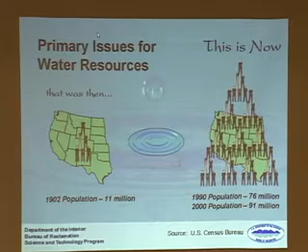Population - what are the drivers behind desal? Growth of population. We're a Western resources agency, and this concerns us tremendously. Why people want to live where it's dry, I have no idea. But then again, I don't live in South Chicago or some dreary place like that - I live in Golden, Colorado, which is a beautiful place. With all those people, we have tremendous water needs.

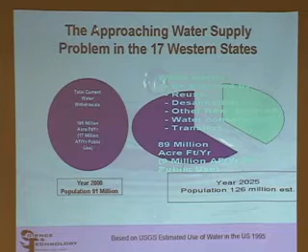This is a really rough calculation - I'm sure there are much better ways of doing it - but basically you take a look at the projected increase in population and how much water they're going to need. The reality is that we're not going to meet this through desalination alone. We're going to meet it through things such as reuse - that's another technology way of doing it. We'll meet it through conservation, through water transfers - there's a whole slew of things out there that are going to have to be done together.

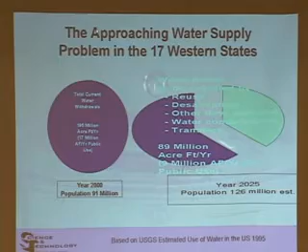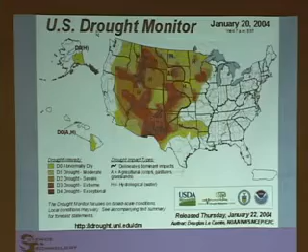Of course, another driver out there is drought. Historically, there was an additional driver, which was international boundary issues, specifically with Mexico. That doesn't seem to be quite as big at this point with our drought, but it's looming out there. It may happen yet. So here's some of the drivers behind why we have problems with water resources.

The growth of the population, need more water. We have drought. We have these what appear to be some sort of a climate pattern that includes drought. We've been in kind of a dry series of years lately. We have a much more complex demand. It's not just for agriculture anymore. We've got a lot of other people wanting it. In fact, some that weren't even at the table originally, such as endangered species and Native Americans.

We have environmental impacts, and then of course, it's still not totally known what global climate change will do, but I'll tell you, there isn't a lot of snow in the Colorado mountains right now. It's melting really fast.

The real big issue when you sit down and talk about desalination is everybody wants to talk about all the different water, all the ways of coming up with additional supplies of water. And when we wrote the roadmap, it was really hard to focus. So we finally came up with this chart and said, here are some of the different ways to deal with water and water supply. And we're only going to focus on the little area on the right-hand side in technology.

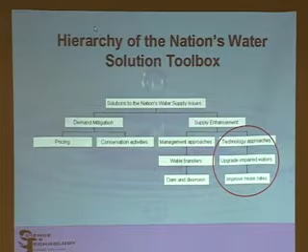Now it ends up that my agency is famous for that other area there, dams and diversions. We don't see a lot of that going on right now. But it's interesting, it's been interesting to us to see what can we do with technology, and specifically desalination and reuse. I'm not going to say too much about reuse, but we have a pretty large program in that.

The Research Council, when they did their report on envisioning the agenda for water resources research in the 21st century, suggested that new supplies could be enhanced by development of new supply-enhancing technologies or reducing the cost of existing technologies. That's really where we headed with our roadmap, was how do we have a chance to reduce the cost of these technologies? These technologies realistically are still too expensive in the majority of cases. If you're sitting in Riyadh, Saudi Arabia, and you have no water sources, it may not be so ridiculously expensive, but where there are other sources, it's a problem.

So the benefits of desalination: basically looking at existing water supplies that aren't currently being used, whether it's brackish or ocean. Drought-proofing — if you're pulling from the ocean, at least depending on how you look at it, it's a limitless supply. That's not exactly that simple. It provides local control. If you're sitting at the end of a great big long pipeline or canal or transbasin diversion, local control starts to mean a lot more to you, especially if you're at the end of the pipeline and you don't have a choice as to what happens to your water, or you have minimal choice.

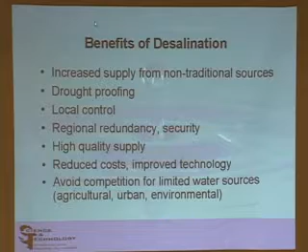This is something our research director came up with. I guess it justifies my existence as a researcher, but it is true. It's very hard to forecast because many times people underestimate what technology will do, both positive and negative. It's been really fun to watch these tremendous dislocations.

In essence, people don't have to string lots and lots of wire for telecommunications anymore. They can do cell phones. Just a lot of neat things. And a few of us actually believe there's still a lot to be learned in desalination, and that's why we've done the roadmap.

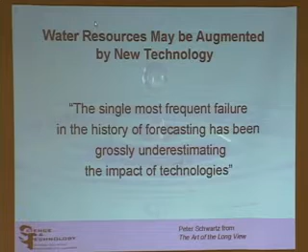And of course, what could the water be used for? Cities, industries, rural Native American issues. We have a real big issue in the Intermountain West with all this water that comes up from when you produce gas and oil. We get a lot more water, actually generally contaminated water, than we do gas and oil. It's a real problem environmentally.

I've always, usually I leave off agriculture because it seems so ridiculous. And I have a slide here which will show that actually some people are doing this, and they're doing it economically.

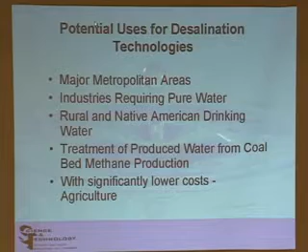Costs of desalination are very variable. They're also not apples to apples. If you're trying to look at one plant, say in Tampa Bay, and they report $2.07 a thousand gallons, and you're looking at a plant in Israel reporting in cubic meters, you've got the problem of translation between the units. But then you also find that people neglect to include their land costs, or they neglect to include subsidies, whether it's for land, electricity, or water costs. So it's really hard to know.

But seawater desal right now is being reported around $650 to $1,000 an acre foot. It can even go higher in very specialized cases. Brackish desalination should be less because there's less salt to take out, but there are a lot of issues surrounding brackish desal, and it's very dependent upon the ions that are in the water.

Just in comparison, some of the water that the Bureau of Reclamation had to rent for the Rio Grande this last summer was running at about $350 an acre foot. Metropolitan, if you're buying new water from them, is running, our understanding is, about $500 an acre foot. Conservation is $350 to $500. Water recycling is $400 to $800.

These are life cycle costs, not just - at least that's my understanding. And of course, bottled water is the fun one, because why anyone would pay $1 per liter for bottled water is still hard to understand. And of course, I have my water with me. So there's a whole psychology to this. There's a whole non-engineering side to water and reuse that we're just starting to investigate right now.

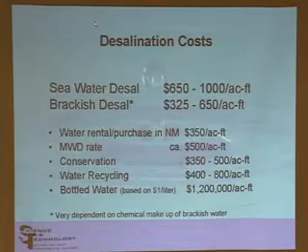So I'm going to talk a little bit about what's going on in the world. There's two competing technologies. One is pretty mature - that's multi-stage flash, MSF. It's a thermal technology. You boil the water, you condense the vapor. It creates very pure water. You see it all over the Middle East.

It ends up that, just as an aside, most of the infrastructure in the Middle East was put there, or at least was assisted by the United States. So if it's a bad idea for them to be doing it, it's probably our fault.

The red line is the membrane processes, or reverse osmosis. You can see that over the years the membrane processes have been overtaking the thermal processes. In Europe and the United States, it's much more economic to pursue the membrane processes than thermal. Generally in the Middle East, they are dual-purpose plants - they produce both power and water, and you can optimize for power and water. In the United States, we don't have that integration of power and water.

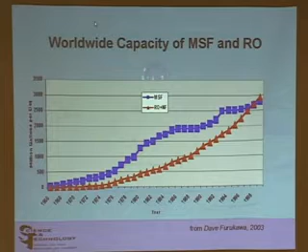To give you some idea of the magnitude, this is Al Jubail in Saudi Arabia. This plant's about 2 kilometers long. Over on this side are the stacks where they generate the electricity. These are what are desalting the seawater, and this thing just goes forever. It's huge. It's mind-boggling. It's the world's largest plant.

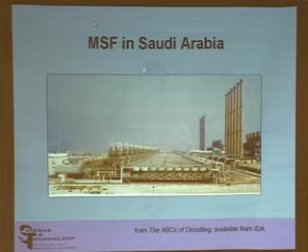And that's been pumping out water now for probably 20 years. It ships a little over 100 miles into Riyadh and provides probably 70 to 80% of the city's water. This was one of the reasons why everybody's worried about the desalting plants during the Gulf War.

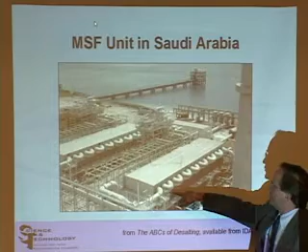Just to show you a closer close-up of one of the multi-stage flash units. These are all the different stages. This is one unit. It's nice because it's modular, so literally you can blow one of these things up and keep the plant running. It's an interesting consideration because it does happen—people don't operate them well sometimes.

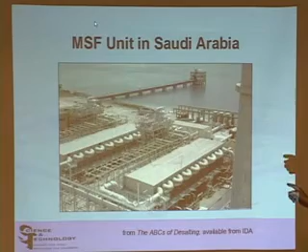And I mentioned agriculture. It ends up that Spain, who you'd never think of doing desalting, has just put in a tremendous amount of desalting capacity. It also ends up that a portion of this is going to high-value crops that are being sold back into Europe—a very, very unusual situation.

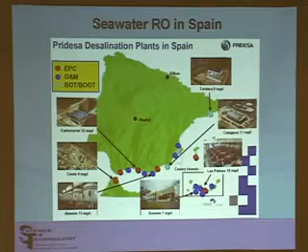And of course, here in the United States, we have Tampa Bay. If anybody has questions about Tampa Bay when I'm done talking, I probably have some information on that one too. This is what got everybody so excited and created desalination fever, to the point where everyone is a desalting expert. And there are real limitations to this technology that are forgotten.

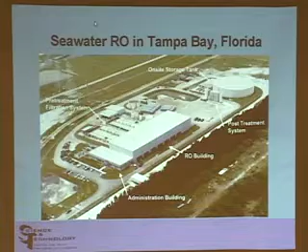Although there is a slight problem: if the water going into these things has particles in it, those particles tend to sit on the membrane and screw up your process. So you've got to have good pre-treatment, and that's one of the issues that's holding up the startup of the Tampa Bay plant right now. This is the first large seawater plant in the United States.

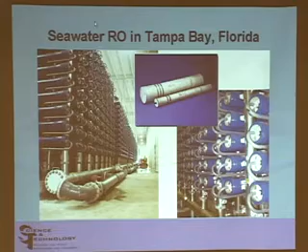Generally we started with some pretty small plants that were quite expensive, and we've seen the costs come down. Tampa was phenomenally low, everybody thought. And then came Ashkelon 1 and Ashkelon 2—these still seem incredibly low. And now we've got Singapore, which seems incredibly low.

I'll mention at the very end, we do have a workshop that we're setting up right now in the first week of December in Cyprus to bring all the world's experts together and start developing techniques to normalize these costs, to do apples-to-apples comparisons. Every one of these plants is costed in a different way, so it looks really great, but you've got to dig into how they came up with this stuff.

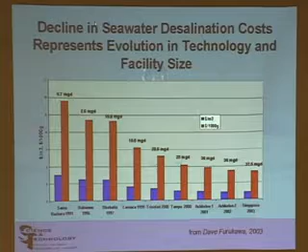This is a very complicated slide, and I apologize, but I wanted to show you that the costs of desalting have come down for many reasons. It's through engineering improvements—incremental improvements. It's not revolutionary stuff. This is the engineers and the vendors doing their job and the marketplace doing its job.

One of the things not to forget is energy. Energy has been the major issue around the use of desalination and continues to be the issue. But we've got some pretty cool energy recovery technology that's just starting to get up to larger plant scale size, and as you can see, the energy recovery has come down tremendously. We're able to reuse about 95% of the energy that goes into these desal systems through energy recovery.

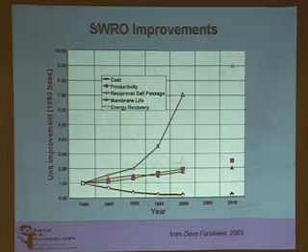I wanted to show you the radical difference that's occurred over just the last 20, 24 years. We've really seen an efficiency in the use of energy. We're about 95% efficient. The real question is, can we get even more efficient? There are beliefs within the research community that we can reduce the current

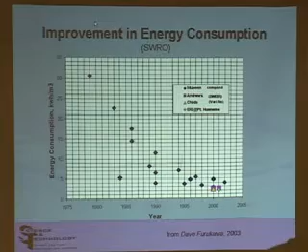use of energy. This is the energy needed, as I understand it, to do the reverse osmosis process. That doesn't mean the pretreatment, doesn't mean pumping up the hills, doesn't mean all the ancillary stuff. This just means around that membrane, taking the pressure up, getting the salt pushed off, and getting the water through the membrane.

This is something we're seeing more and more of, going in to replace MSF. If you look at reverse osmosis with the older energy recovery, it's a pretty good change in efficiency. Our contractor VARI-RO is showing how much greater they are than this. But the point is we actually have about three technologies: VARI-RO, the DWEER, which is going into some commercial plants right now, and ERI, which is also going into commercial plants. VARI-RO is yet to go into a commercial plant.

But you can see we're continuing to squeeze out the last bits of energy.

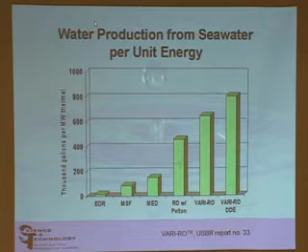The cool thing is this one right here. We were looking at a Brayton cycle engine. What would happen if we converted the energy source directly into mechanical energy? Not go to electricity and then to mechanical energy, but go directly to pressure. That's what this one is all about, and we can actually create some pretty good efficiency. So there are ways of squeezing the energy and recycling and reusing it better than we do.

And it's not because of the technology, it's because it costs so much. The government doesn't want to spend $30 to $40 million a year to run the plant when there are other ways to get that water to meet the treaty with Mexico, or at least to meet the water quality obligations that we have with Mexico.

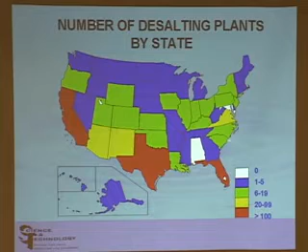This is for the policy types, the stuff that's being presented to the policy types. So I would say take it with a grain of salt. There's somewhat of a desalination fever here. Some of this stuff is for real, but I would say the majority is just being talked about.

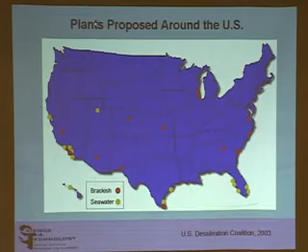So in terms of reducing costs, where are we today? Well, Tampa Bay taught us some interesting lessons. Creative financing goes a long way. There are ways of reducing bond costs through public-private partnerships, things like that. Also, we learned that co-location with existing power plants works out really well to bring down desal costs, because we don't have the infrastructure for the intake and outlet that we normally would have. We can piggyback off the power plant, and we can also take a bit of the heated cooling water, which improves our desalting process.

There is some opportunity for maybe doing regionalization, building bigger plants to bring down costs more, that type of thing. But really, from my perspective, the highest potential to reduce costs is to find better ways of doing desalting through research. And that's what the roadmap was about.

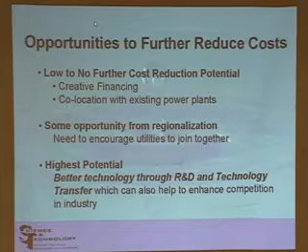Now, the roadmap is not a report of the Bureau of Reclamation. This is a sleight of hand. The Bureau of Reclamation is afraid that we might make policy by saying that we support desal. But it is a report of the Executive Committee.

The Executive Committee is pretty cool because we had an economist work with us engineers. We even had a public health expert. We had a real utility person, political scientists, university professors, and some consultants. They always help us, but we went outside of where we normally would go to get their input on what they see as essential to make desal work, and what research areas we need to be in.

My management, or the Assistant Secretary's office at the Department of Interior, wanted to better understand the value of this roadmap. So we ended up taking this to the National Research Council, and in the last month or so they published a report on this. You can get the report off their website, and you can get the roadmap off ours. I'll talk a little bit about the roadmap.

I'll try to summarize this in a simple way, and if you've got questions, I'll be happy to answer them. I don't think I can do justice to the roadmap. We struggled for at least our first 3 or 4 meetings to figure out what a roadmap was. What we did is we created a vision statement, and that helped bring us together a bit.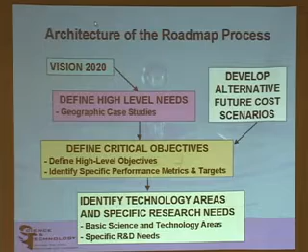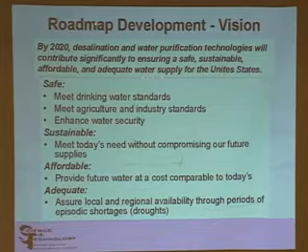The vision we came up with - the National Academy's review had some issues with a couple of our words here - but it comes down to: by 2020, whatever research we do, we would like to have made our drinking water supply more safe, in a sustainable way, in an affordable way, and make sure we have adequate supplies of water. Now, all these things are really hard to define, especially when you have an economist, a political scientist, and a chemical engineer - their definitions of these things really vary. So it was a great discussion.

So as I said, we broke the needs into different geographical areas, and one of them was coastal urban communities. About 54% of the US population lives along the coast or close enough that a seawater desal plant might have an impact, depending on how high up you have to pump the water once you desalt it.

Various parts of the country have different issues. Tampa Bay is interesting because basically they have a great big sponge here, and they're pumping it dry, which is hurting the environment. Southern California has these major transbasin diversions of water feeding population. Coastal Texas has subsidence and other issues - in fact, they import a lot of water from inland too.

So what were the needs? We want to reduce the cost. This biologic stability is a pretty specialized thing, but we want to reduce the reliance on surface water that is needed for estuaries in the coastal regions. We also want to decrease the reliance on remote sources of water.

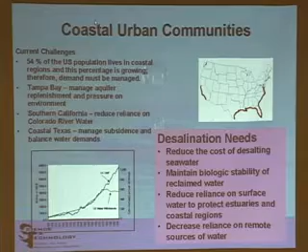Inland urban areas—these are the Las Vegases, Phoenixes, El Pasos, those types of cities. Anyone that's looked at desalination knows that the number one problem in desalination, and it shows up with these cities, is...

The real issue here is disposal of the concentrate. You don't destroy salt, so where does it go? Big, big problem. If you take a look at inland desalting, the real cost is not the desalting process, it's the concentrate disposal process, and it can easily double the cost of a desalting plant.

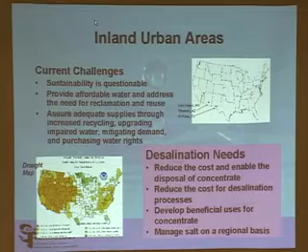So that's where we're investing quite a bit of research dollars right now. I'm just going to continue on through this and talk about some of the different issues here.

Rural inland communities—the Bureau of Reclamation is in a strange situation. We're being directed by Congress to build huge centralized treatment plants on the Missouri River, for instance, and these things have huge distribution systems that go out 1,000 miles. It's hard to keep a chlorine residual, that whole bit. So we're looking at point of use treatment, and desalination is a great way to do that. But we're limited by law that we can't pay the operation and maintenance of these things. When you get to point of use, it's all about operation and maintenance, not about paying for the infrastructure.

I mentioned earlier coal bed methane and the pumping or producing of oil and gas. We produce a lot of water in the inland states. This is becoming a real environmental disaster. In some cases, they actually pay $10 per barrel of water, which is a lot less than 1,000 gallons, to remove the water, to pump it back down into the ground. So desalination all of a sudden starts to look economic in some of these cases. It ends up that Department of Energy, Sandia, our partners on the roadmap, are pursuing this area. I think that's a great place for DOE to be spending some research dollars.

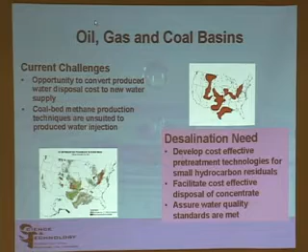Mid-Atlantic—nobody thinks of the Mid-Atlantic having water problems, but obviously they're overpumping their aquifers. They have tremendous issues about protecting their water supplies, whether it's New York City and all the communities that live up in their watershed area. I even heard recently New York City was looking at desalination of some of the bay. I think it was just a study, but...

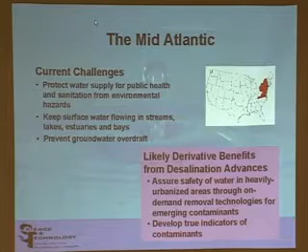Now I talked about critical objectives. What we did here is we said, okay, we want to do something in the next 5 to 8 years. We also want to do something over the next 15 to 20 years, and so we have what we call a stretch goal. The short-term goal, for instance, on keeping water affordable is to be able to reduce the capital cost of a desalting plant by 20%. In the long term, and who knows how we'll ever get there, but it means we've got to develop some new technologies, new methods of doing things. We would like to see, as a stretch goal, the capital cost of these plants reduced by 80%. Might mean we have to get rid of the pretreatment.

In other words, our membranes do everything—could be other ways. We want to increase the energy efficiency from where we are today by 20%, and ultimately from where we are today by 80%. People are saying this is impossible. It ends up that it might very well be impossible, and so the next part of our roadmap is to go back. The National Academies have a proposal in with us and EPA and a bunch of the nonprofit research foundations where they would put together a panel of expert scientists that would go back and review the different technologies and see where is the theoretical limit, how far can we push these things, and get this onto paper. The last time something like this was done was in about 1962, and it's a great way to try to set goals for researchers to accomplish. Also, it helps people like me justify the requests for the budgets that we ask from Congress.

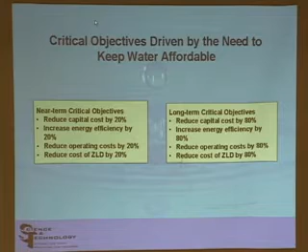We send salt into Phoenix. We have mounds and mounds of salt in that water, and it's not being disposed of—it's going into the groundwater. The same is going to be true of desalting. Where is that salt going to go? You can't just send it to the next city down the river. What we really need to do is figure out an effective way of treating our concentrate, taking it down to salt, and ultimately the dream—which is really, really difficult to accomplish—is are there commercial values to these salts? Are there ways we can get a product or a value, somebody to pay for them?

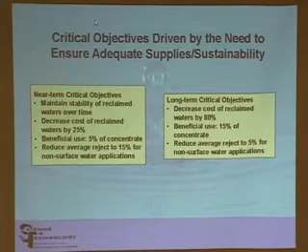And these are some of the things on sustainability, and I'll just skip through this real quick. I'd like to get on to some of the other things.

We broke the research into technology areas, and we actually came up with five. I've added a sixth because the National Academy said you forgot something—you forgot this basically cross-cutting technologies, and what we're talking about there is the energy-water nexus. It's kind of ironic that a water agency and a DOE agency would forget the energy-water nexus, but we did. So what we've added here are membranes, thermal, recycling, concentrate, innovative technologies—these really far out things, not just the stepwise incremental improvements, but we want to see step changes in technology.

And that's where the crazies—I always like to talk about crazies—this is where the brilliant scientist that we think is nuts today actually does something that shakes the foundations of our beliefs. In essence, you can look at membranes as having done that. Membranes didn't exist—well, of course, the human body had them—but membranes as a technology did not exist until the late 60s, and it took us many, many years to really learn how to do those separations. Before that, it was a laboratory curiosity, and nobody could figure out how to do it on a large scale. They were too thick, took too long for the osmosis to occur.

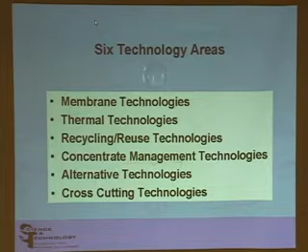But again, we have critical objectives. We want to do these reductions by 20%, and you ask, how did we come up with 20%? That's what the National Academies asked. We do have a rationale, but it isn't firm enough, and that's why one of our next steps is to work with the National Academies to put more science to our initial estimates. And of course here we're saying 80% capital costs, energy efficiency, operating costs, zero liquid discharge. Pretty aggressive.

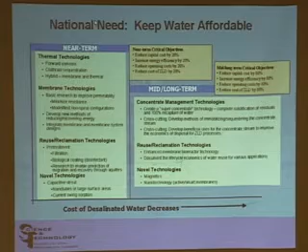So why do we do research and demonstration? I'm just going to sort of wrap up on the roadmap. It's to help policymakers create options. No one that has to solve a problem wants to be told you have only one solution. They want to see what the different solutions are, what the different trade-offs are, and what will work best for a given situation—every situation is different.

From my perspective in the federal sector, we help fund research because we want to push technology along by taking on risk that private industry is unwilling to take because they don't make profits, that the individual inventor can't take because the inventor doesn't have the deep pockets. So basically we want to share the risk of R&D, and we want to encourage the universities and the private sector to work together with the utilities that have the needs.

We also want to be able to show that what we're doing has sustainability attached to it, that these things we're doing aren't going to harm our future generations. We have a mandate to provide this information. Unlike the private sector, we don't keep secrets—private sector has to have competitive advantage, we don't. We want to find the information and get it out so everyone can play with it, and that one crazy out there who sees the world differently grabs that and creates something new, and does the step change in technology that possibly could occur in desalination.

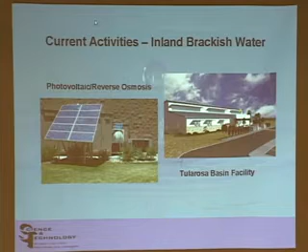I mentioned concentrate disposal - we're trying all sorts of almost crazy ideas. Dewvaporation is one. This is a thermal process. Basically we're evaporating water from the surface and recondensing it on a different surface. We thought this would be great for rural inland communities that have non-technical people, so we could produce fresh water maybe in North Africa or on our Native American reservations, things like that.

But it ends up there's a strange technical quirk to this. It ends up that we may actually be able to create salt on the surface of the water as the water evaporates off, and we'll get a slurry of salt coming out the end of this. So what we're pursuing right now is concentrate disposal with this, not fresh water. Later we'll pursue the fresh water.

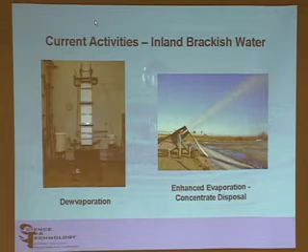It also ends up, and this is where our interest is, that you can take these things and hook them directly into an RO unit and desalt the product coming out of your sewage.

And so this then leads to indirect potable reuse. It's a big issue in California, so I'm not going to go into indirect potable or direct potable reuse. But it ends up the city of San Diego has got to do something about the sewage they're dumping into the ocean, and they're landlocked. Their current plant has taken up all the land space. So this very well may be where we first see an application of this, because we can do a lot more intensive treatment of wastewater with this technology.

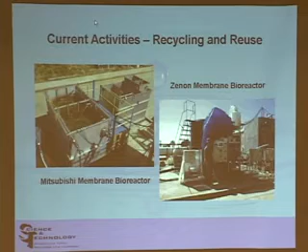I had mentioned high energy pumps. People who have heard about desalination probably know that the city of Long Beach has a process they're testing, using Bureau of Reclamation's money and their money, called nanofiltration followed by nanofiltration. And this again is one of those crazy ideas. When I went to the first meeting on this, I told the guy no one in their right mind would consider this, and I said that's a good reason to patent it. And of course, they were patenting it at the time. There are a lot of engineers still out there saying this won't work. But it's intriguing. It does look like maybe there is something going on where we can reduce some of the capital costs, reduce some of the chemical or energy consumption, and maybe deal with some of the issues surrounding boron. Boron is an issue in desalting seawater.

And so really what our purpose in the Bureau of Reclamation is, I have people in my group that have helped set up the test program with the intent of doing two parallel systems, so we know for real: is there a cost benefit in this technology? Because it's not dramatic. And again, it's one of these things where it's nice to have several tools in your toolbox, because it may be that this has some advantages over the existing technologies, like the boron and other things.

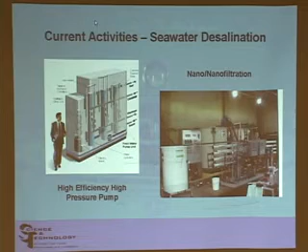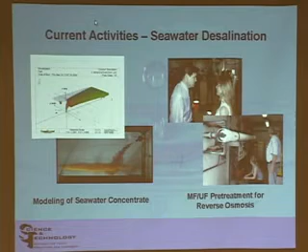I'll just continue on through some of this. We've done some funding to improve the CORMIX modeling, looking at effluents that are more dense than seawater. We just finished, or our principal investigator, who's actually right there, she just finished her study in Texas on pretreatment for seawater reverse osmosis and costs. She still doesn't have it done, which is really frustrating, because everybody wants this after Tampa Bay, because everybody wants to know about pretreatment and how best to do it. We looked at ultrafiltration and microfiltration pretreatment, which is more advanced than what they did in Tampa Bay. And of course, this is Yuma, treating irrigation return flows. We've got a lot of work going on still in the San Joaquin Valley.

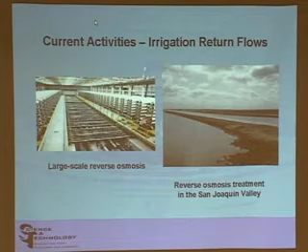Okay, getting into the next steps. This is the part that I said I could spend the whole talk on. In the next couple of weeks, we will be advertising a request for full proposals on desalination research. We have several million dollars to spend, and we're looking at laboratory scale, where we spend up to $100,000 of our money. Pilot scale, we spend up to $270,000 of our money. And actually a couple of demonstration plants where we'll be spending over 3 years up to $1.5 million of our money. We don't know what projects will come in; we review these with an expert panel, and it's merit reviewed, and it's very competitive. So if you're interested, I'll have a website in the next slide or two that will direct you to this.

This is some of the fun stuff. Congress asked us to identify obstacles, physical, financial, institutional, regulatory, to net new water. And this is the idea of, say, the city of Las Vegas pays for a desalting plant in Los Angeles. Los Angeles says, gosh, we don't need some of the water that we would normally take out of the Colorado River. In Las Vegas, you can use it. That makes a lot of sense, sounds easy, but it's extremely complicated, and it's so politically charged that this is an in-house study. We aren't involving any of our stakeholders, because even internally, people... our first meeting is tomorrow morning, and I'm going to miss the first part of it, but it's going to be fun to hear what just the Bureau people have to say about this one. So the idea here is to develop tools for our planners.

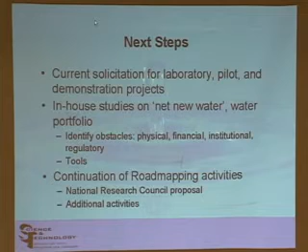Congress asked us to do a desalination clearinghouse. This has slid a bit this year, which is really not good, but we still have a website. We have all of our reports, about 100 reports on the website, all in PDF. We continue to do a newsletter, so we're trying to keep people up to date, but we want to actually go into a database of all the desalting plants in the US, to define the field better so people aren't generating this stuff over and over again.

I'd mentioned earlier we want to do a study with USGS to figure out where the brackish sources are, how accessible they are, and whether they would really add in a sustainable way to water supply. I don't think those answers are out there yet.

We're working to reauthorize the Desalination Act that Senator Simon put into place before he retired, and a guy named Jack Jorgensen, one of my mentors, actually helped Senator Simon write it. It's very focused on desal research and ultimately to the benefit of the international community, not just the US, but others who probably have even more need than we do.

And speaking of the international community, I wanted to bring these up. The World Bank is just finishing a study right now on desalination to educate their staff as to what the opportunities are. They've been looking in Asia, North Africa, the Middle East, and I haven't seen the final draft yet, but they've had a bunch of experts working on it for about 6 months.

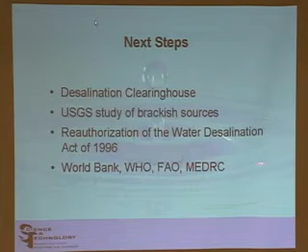I want to digress for a second. There's something in your backyard that we've been playing with, and from my perspective sitting in Denver, it's really neat because I don't get to go to Alcatraz very often. It ends up that Alcatraz is not one of your water-rich places, and we have a captive audience—1.4 million visitors that the Park Service takes over there every year. The superintendent of the park has a plan to change Alcatraz from the rundown situation it's in now into something like Crissy Field, which they recently redid. They want to go back and redo this.

I looked at this as, man, here's a whole captive audience for advanced technology in water. So we've been playing around with this—they desperately need water, and people pay to go out there. What we've been looking at: we've done an appraisal study. We've been looking at fixing the cisterns and capturing rainwater. We want to do reuse, recycle the water. We want to do desal. And we want to do it in a sustainable way where all the energy on Alcatraz is renewable.

The idea here, what we started with Brian at the Park Service and my research director Shannon, was this vision that we want this to be a demonstration of what we can do with technology, water and energy. Right now it's languishing just a little bit and needs a good kick, but it's a great vision. It gets me really excited.

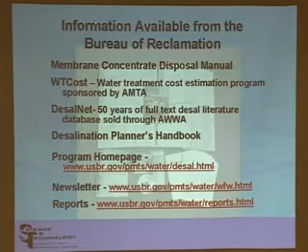We have a lot of time for questions, comments. Oh, please.

It's Connor Everett from the statewide Environmental Desal Working Group. I'm sorry I missed a little bit of the beginning, but I've been following the issue of the state desal task force that went around the state to discuss the issues.

I'd like to talk about what the social impacts are of desal, beyond just the engineering potential. We really haven't seen a large-scale successful desal plant in the country, with Tampa Bay not working and the Yuma desalter not working. We've been through this in the early 90s with Santa Barbara, which was going to do an exchange of water with Las Vegas. It never really happened because it wasn't cost effective to run their desalter. So there's an issue of the cost of desal and who that cost impacts, and there are many unanswered environmental impacts as well. I was wondering if you would address those issues as well as just the technology.

The social aspects of desal isn't really an area I feel I have expertise in, to tell you the truth. I've spent a lot of time in the Middle East working on projects, so I get to see what happens when you have no water or very limited water. In that case, desal makes a lot of sense. But for the social impacts, maybe the easiest way I could answer is that's how I view our in-house study for net new water.